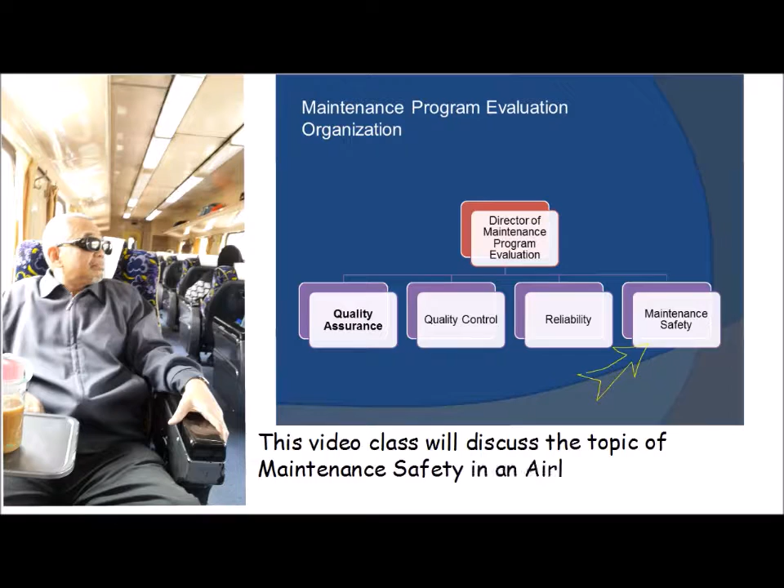We are completing our discussion on the maintenance program evaluation organization. This video class will discuss the topic of maintenance safety in an airline engineering department. Maintenance safety section is responsible for safety program, health matters and safety equipments.

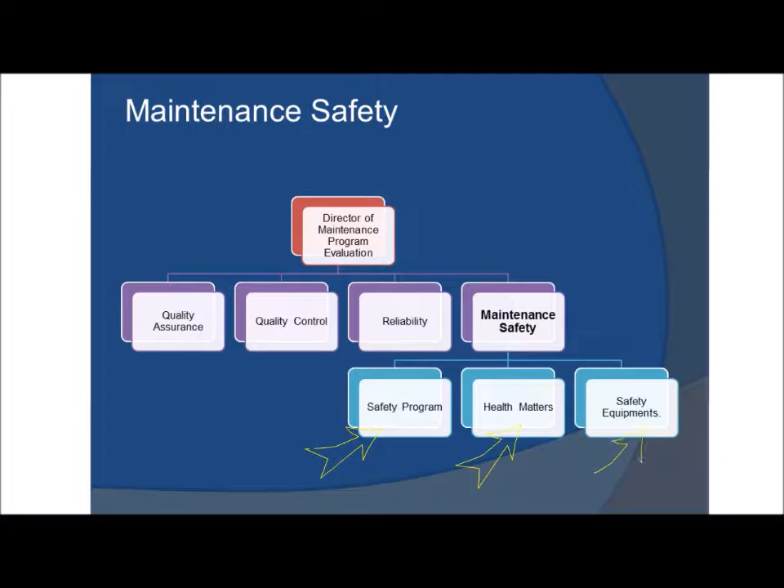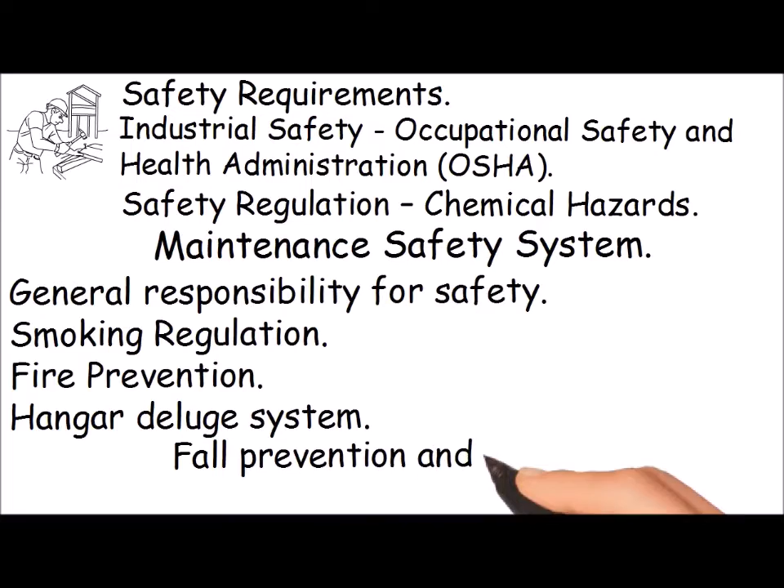As requirements, the following are the various safety regulations to comply with: Industrial Safety, Occupational Safety and Health Administration (OSHA); Safety Regulation; Chemical Hazards; Maintenance Safety System; General Responsibility for Safety; Smoking Regulation; Fire Prevention; Hangar Deluge System; Fall Prevention and Protection; Accident and Injury Reporting.

The person in charge of this section is the safety manager. The responsibilities of the safety manager are: the safety coordinator is the manager or administrator of the safety program, responsible for establishing the safety rules and procedures, auditing the M&E facilities along with QA for adherence to safety policy, developing improvements to the safety program, and maintaining records and filing claims relative to accidents and incidents involving M&E personnel and equipment.

Each supervisor for a work area is responsible for the safety of his facilities and personnel. This begins with clean, well-kept offices, shops, etc. The supervisor must enforce all safety rules and provide instructions and interpretation of rules, regulations, and methods of preventing incidents in his work area.

Employees are responsible for compliance with all airline safety rules and practices and will report deficiencies when noted. They are also responsible for proper use of tools and equipment and proper operation of machinery.

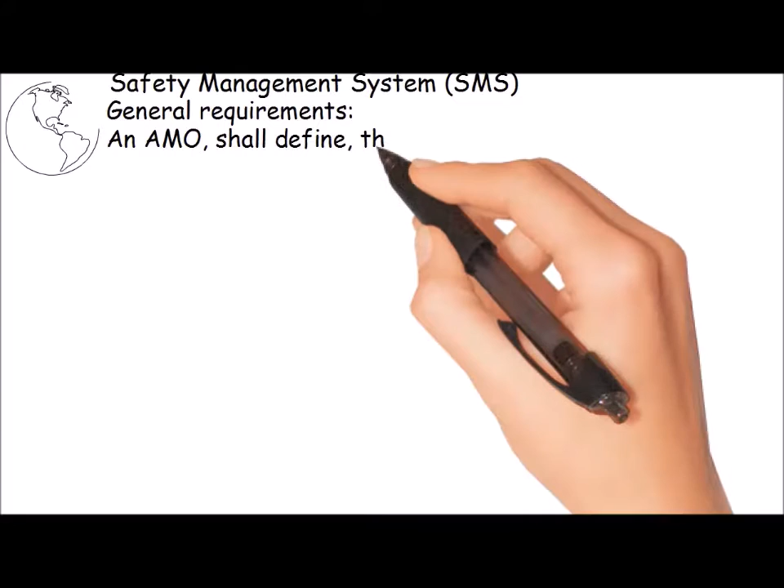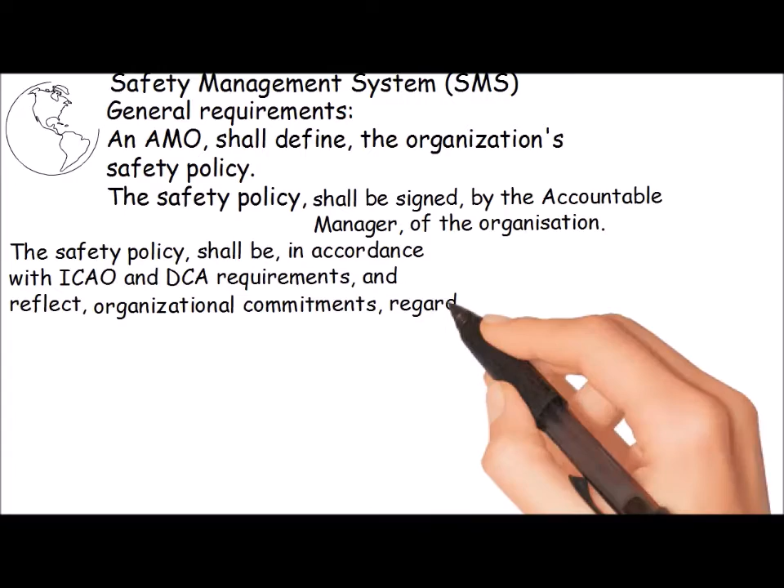Safety Management System (SMS), general requirements: the AMO shall define the organization's safety policy. The safety policy shall be signed by the accountable manager of the organization. It shall be in accordance with ICAO and DCA requirements and reflect organizational commitments regarding safety. The safety policy shall be communicated with visible endorsement throughout the organization.

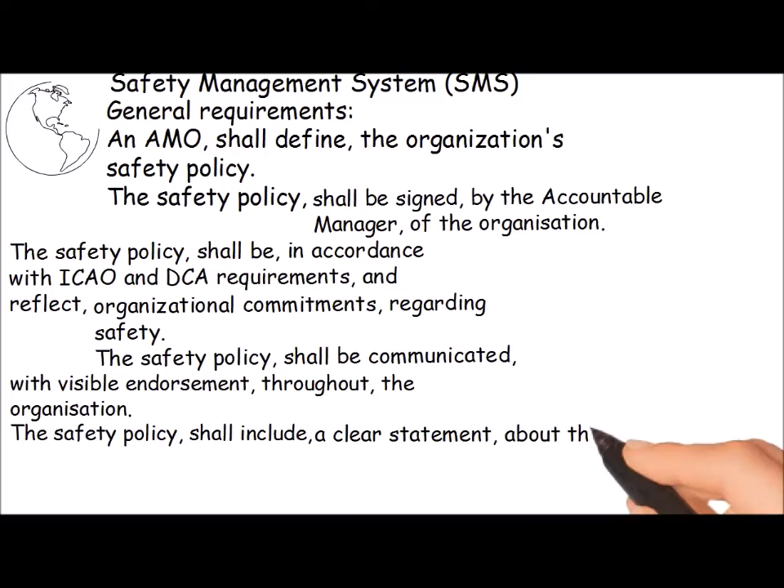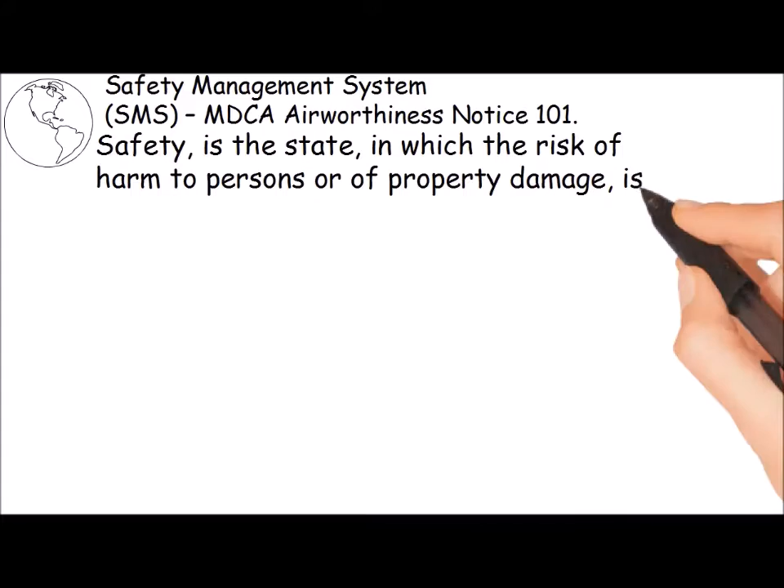The safety policy shall include a clear statement about the provision of the necessary human and financial resources for its implementation. Safety Management System (SMS), MDCA Airworthiness Notice 101: safety is the state in which the risk of harm to persons or of property damage is reduced to and maintained at or below an acceptable level.

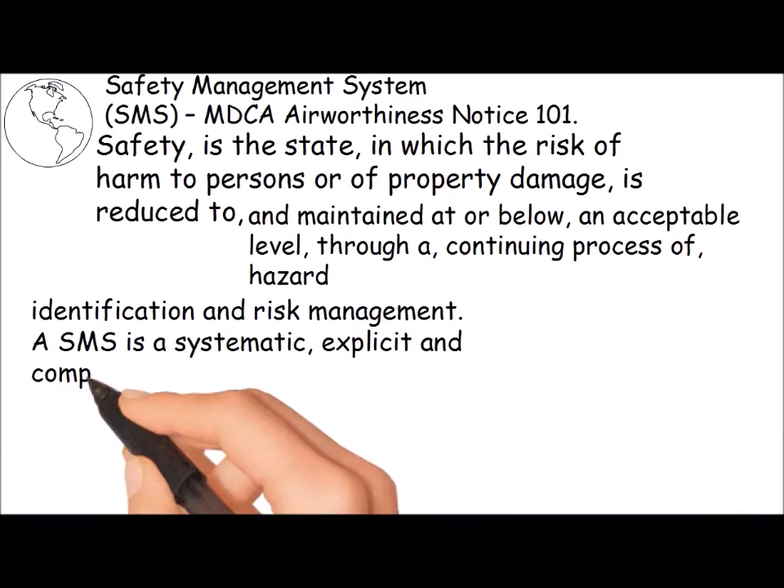This is achieved through a continuing process of hazard identification and risk management. An SMS is a systematic, explicit and comprehensive process for managing risk. SMS provides for goal setting, planning, and measuring performance. SMS is woven into the fabric of an organization and becomes part of the culture, the way people do their jobs.

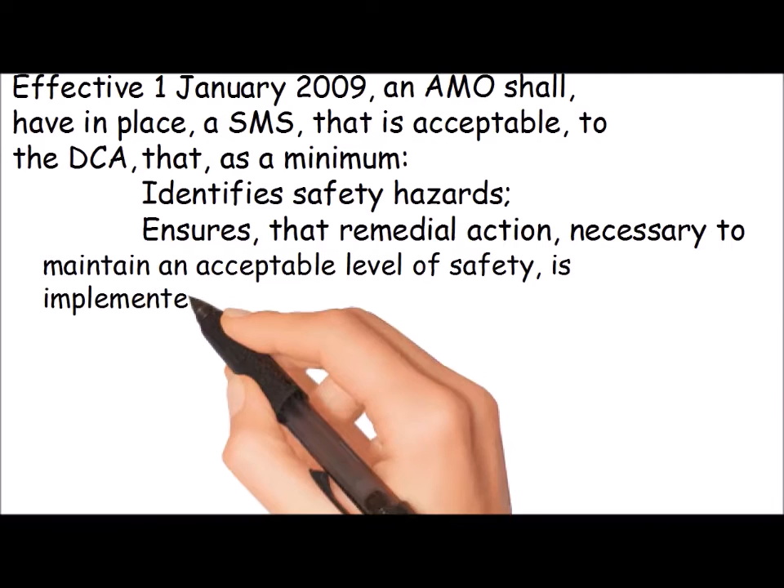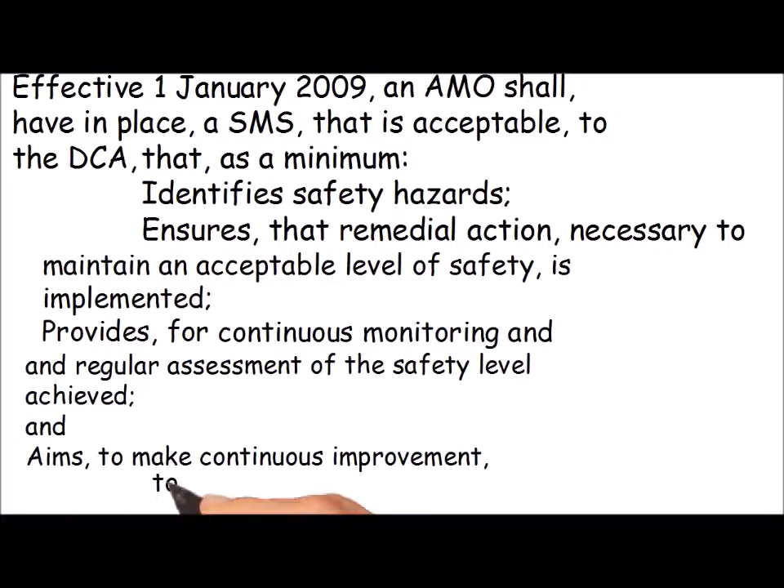Effective the 1st of January 2009, an AMO shall have in place an SMS that is acceptable to the DCA, that, as a minimum, identifies safety hazards, ensures that remedial action necessary to maintain an acceptable level of safety is implemented, provides for continuous monitoring and regular assessment of the safety level achieved, and aims to make continuous improvement to the overall level of safety. In order to be acceptable to DCA, an AMO's SMS shall meet the requirements set forth in this notice.

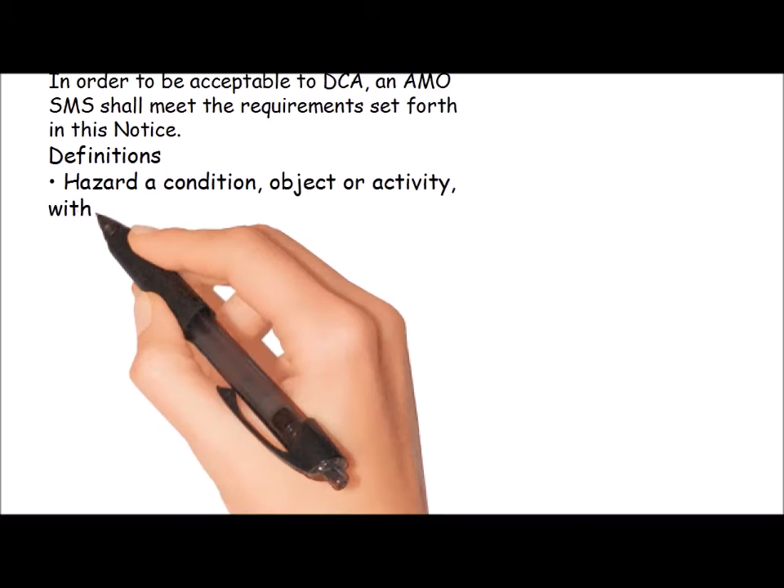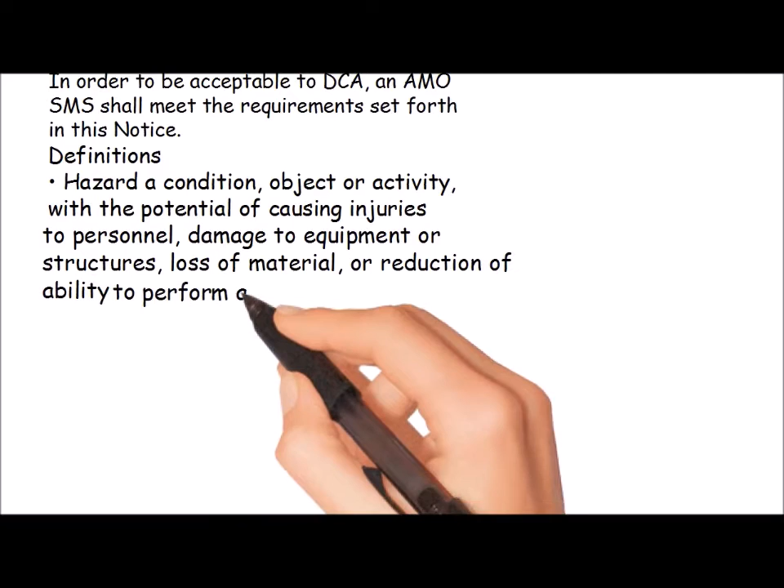Definitions: hazard - a condition, object or activity with the potential of causing injuries to personnel, damage to equipment or structures, loss of material, or reduction of ability to perform a prescribed function.

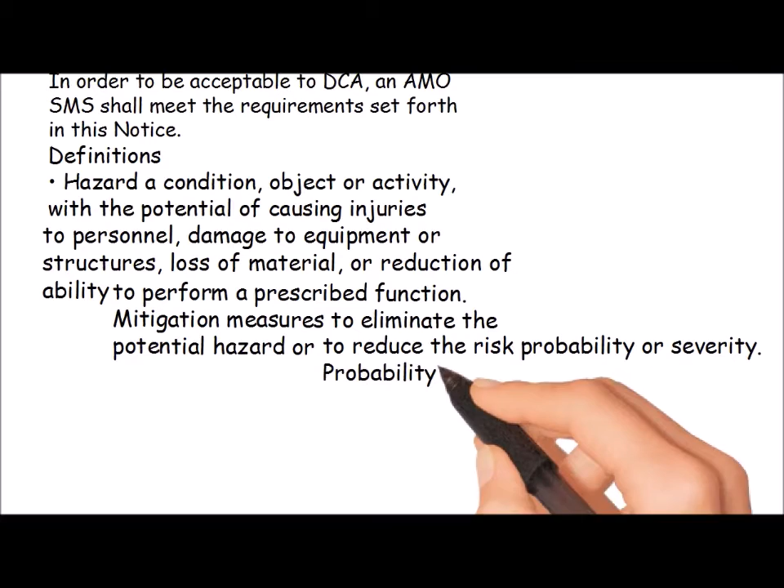Mitigation measures: to eliminate the potential hazard or to reduce the risk, probability or severity. Probability: the likelihood that a situation of danger might occur. Risk: the chance of a loss or injury, measured in terms of severity and probability.